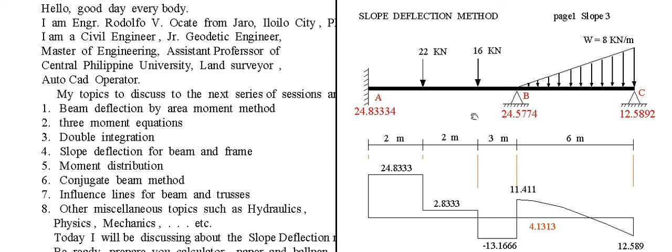So we need to determine first the formula for the fixed end moment. We need the area for the fixed end, both sides of the beam as fixed when loaded with uniform load.

The formula of the fixed end moment at A is equal to fixed end moment at B, and the formula is WL square over 12. For concentrated load, the fixed end moment at A is PAB square over L square, where A is from A and B is from B.

Then solving for the fixed end moment at B, you just reverse: P times B times A square over L square. For a triangular loading, the fixed end moment at A is WL square over 30. Fixed end moment at B is WL square over 20. Fixed end moment at B is bigger than fixed end moment at A.

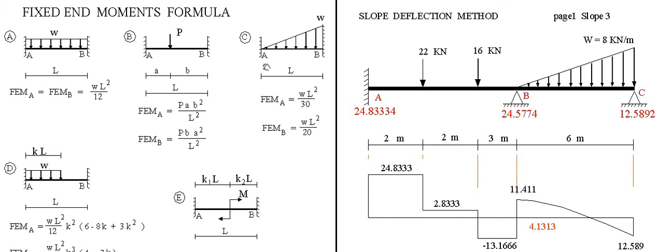Then for partially filled with uniform load, we have this formula, and it is a very long solution, so I just leave that for a while. And if we have a couple loaded in a fixed beam, both ends fixed, we have this also formula.

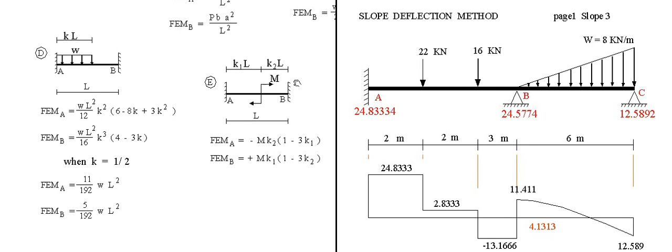Then we have this fundamental equation of slope deflection. We need to have a fixed end moment first. For moment at AB, meaning moment at A, the fixed end moment AB is required, then plus K times 2 theta A plus theta B. The order of the subscript is A first, then B.

A, then B. For moment BA, we need to have a fixed end moment BA plus relative coefficient stiffness factor 2 theta B plus theta A. The same, we follow this order: B first, then theta A.

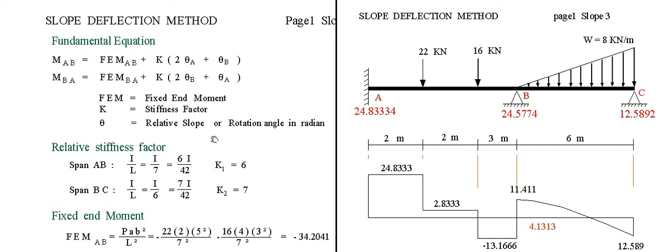Definition of fixed end moment, K stiffness factor. This must be relative. Theta is the slope or rotation angle in radians. Okay, relative stiffness factor.

For this, given now the 7 and 6, the span AB is 7 and BC is 6. So for AB, relative stiffness factor is I over L, this is 7 for AB. Then span BC is I over L, or I over 6.

Solve for the least common denominator for 7 and 6. So 42 is the least common denominator, meaning 42 can be divided by 7, and 42 can be divided by 6. So this is a proper choice of the denominator. We call this the least common denominator.

So 42 divided by 7 is 6 times I, or 6I. This is also 6I over 42, which is I over 7, just simplified. Then 42 divided by 6 is 7 times I, or 7I. This is also I over 6. Now this simply shows that the K here for AB is 6 and the K for BC is 7.

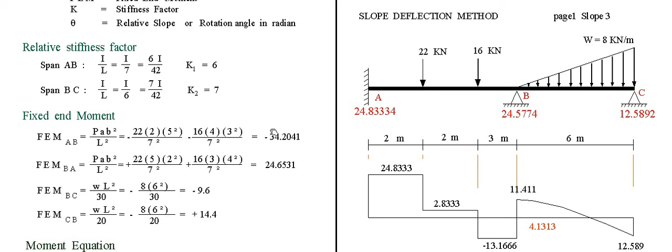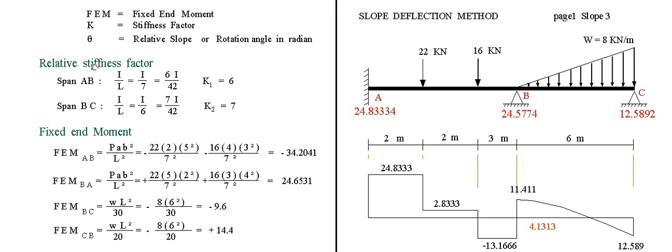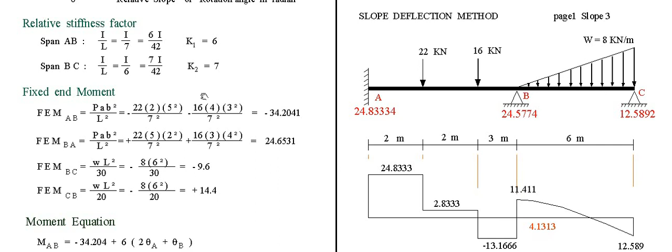Now, requirement for the slope deflection, you have to follow these headings or instructions: relative stiffness factor, fixed end moment, moment equation, joint condition, joint moment condition, then the reaction. The order of solving this, you have to follow this. If you want to have a shortcut, then do so, but this is my best approach. You have to follow this.

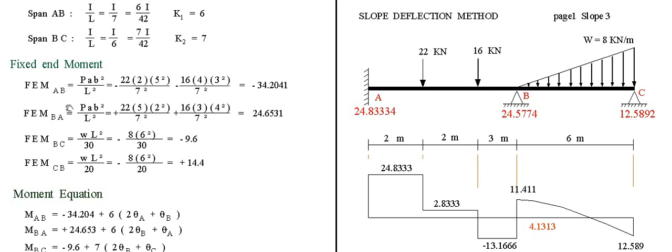So the fixed end moment for AB, we have basic equation PAB for any concentrated load. The formula is still the same. I will explain this. For A, fixed end moment is 22 times 2 times 3 square, 5 square. Again, 22, nearest to A is 2, then further from A is 5. So this is 22 times 2 times 5 square over span of 7 square, PAB square over L square.

Then another load is nearer distance to A, 4, then 3. So minus 16 times 4 times 3 square over 7 square. Near distance is 4, then 3, far distance 3 square divided by span of 7 square. Simplifying this, the fixed end moment is minus 34.2041.

For fixed end moment BA, from here up to here, I will discuss here first. For 22, fixed end moment BA is 22 times near distance 5, then far distance 2 square divided by 7 square. This is the one: 22 times 5 times 2 square divided by 7 square.

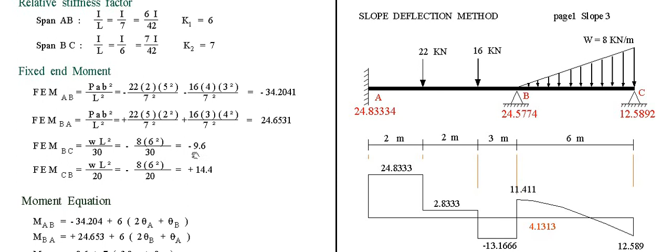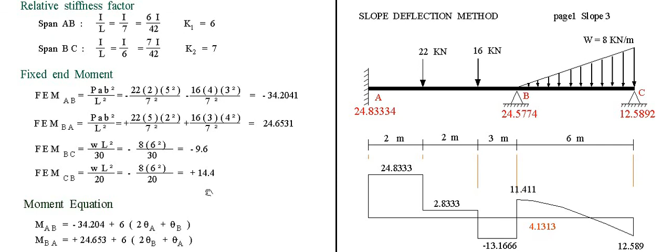Okay, for the source span. Then next heading is moment equation. So the formula is fixed end moment AB plus K times theta A plus theta B. This is fixed end moment equation. Fixed end moment times the K, 6, here 7. Remember, this is 6. For the first span, stiffness factor is 6, then second span 7.

So we have moment equation: we have 34.204 fixed end moment plus relative stiffness factor of 6 for AB times theta A plus theta B. The order is A first, then B next. Then moment BA, fixed end moment first is 24.6531 plus the K for AB, 6, times theta B plus theta A.

Stiffness factor here is 6. For the next span, BC, stiffness factor is 7. Fixed end moment 9.6 plus stiffness factor of 7 times theta B plus theta C. Then moment CB is fixed end moment of 14.4 plus 7 times theta C plus theta B.

So very easy to remember. Then the joint condition also very easy to interpret, that moment BA plus moment BC, they are equal but opposite in sign. So if they are equal but opposite in sign, when you add the two moments here on the left and on the right, the sum is 0. Okay, the sum moment BA plus moment BC must be 0.

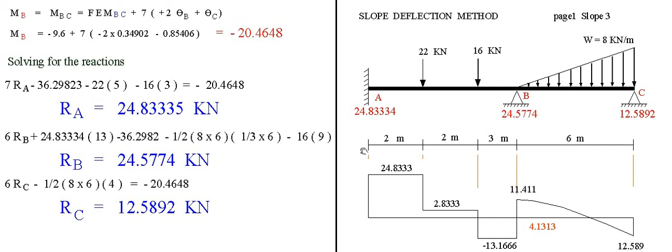Then solving for RB, you take moment at C, which is simpler than taking moment pivot at A. Anyway, you can proceed with either moment at A or moment at C. In this solution, I take pivot or moment at C equals 0. So RA now is given as 24.833, since it was already solved. I want to solve RB, which is not yet solved. So take moment at C equal to 0: RB times 6 plus reaction at A

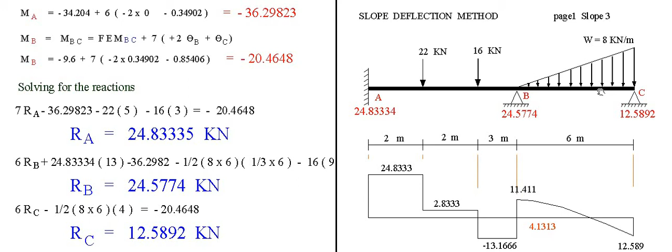times 13 (distance 6 plus 7), then there is moment at A of 36.2982. Then the triangular load is 1/2 times 8 by 6, times distance from C of 1/3 of 6, or 2. Then minus the concentrated load of 16, this distance is 9. Then minus 22, this distance is 5 and 6 is 11. Then equate to 0.

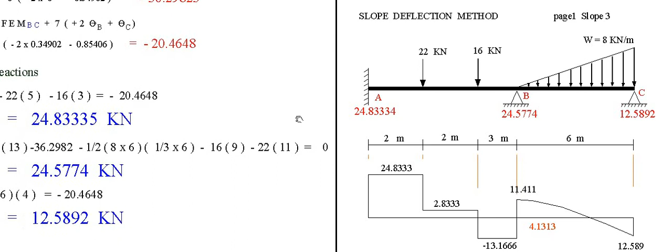We have one unknown RB. Solving for RB, we get RB equals 24.5774.

Using a simple calculator, now to solve for RC, cut the section at B, then consider only the right side of B. Never mind the left, because on the left the moment...

On the left of B, this is equal to positive moment at B, 20.4648. The direction of the moment at B is counterclockwise here.

Negative here means you bend the beam going clockwise. Moment at B here is clockwise, this one counterclockwise.

Then, given the three forces RA, RB, RC, and the external forces, you can draw the shear diagram as this.

Okay, there is a problem here - whether the parabolic curve, this triangular section, the next curve is parabolic - whether this is concave downward or concave upward.

Now you can plot this, but you don't know the nature of the curve. So my analysis is that considering the force, the shear - the rate of drop of this triangular...

At the beginning of B, the rate of drop is very small. From 0, it is increasing and increasing until maximum at C. The rate of drop here is very small, so the rate of drop is very small. This is almost horizontal at first, then drops higher and higher going to C.

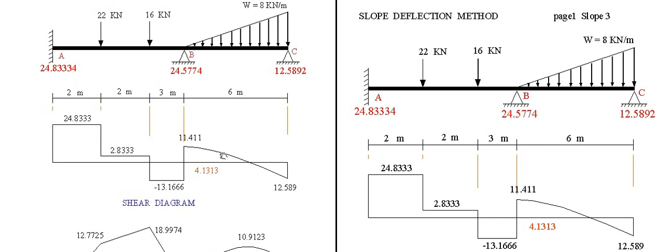So I am sure this is concave downward, not concave upward. So it is very easy to plot the shear diagram or whatever curve - just take note of wherever the rate of drop is.

Then the moment diagram will look like this - this is third degree parabolic, this is second degree parabolic. Now this discussion of the shear moment diagram is under strength of materials, and I don't want to discuss this anymore. Even writing the second degree here, it's up for you to interpret, but the values are now ready for you.

Just check these moments - this moment we have solved, this moment we have solved. The maximum moment is derived here with this distance. I want to discuss this, but as I've said, this is under strength of materials.

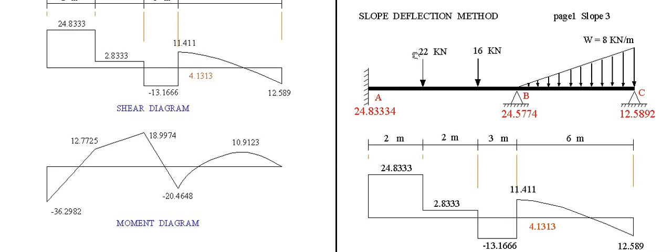Okay, that concludes the solution to this, and I challenge you to solve a practice problem. This is a new problem for you.

Change P1 to 18 instead of 22, change that to 18. P2 is 15 here, and W instead of 8, change that to 10. Then solve for that.

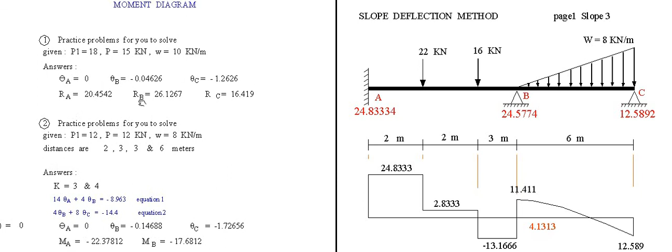Okay, theta A is 0, theta B is like that, and theta C is negative. Then RA, RB, RC are these.

So for you to practice on your own, use my guide on how to solve. These are the answers: 2 moments and 3 reactions.

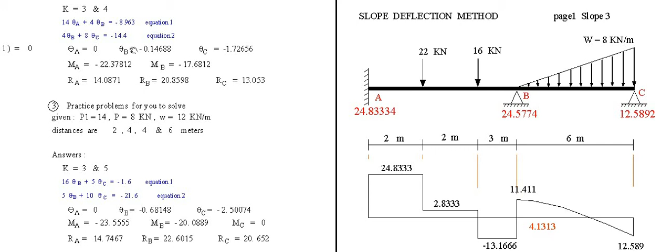Now the second challenging problem: P1 is 12, P2 is also 12, then W is 8. Change only this. Then the answers are - I make the solution, the equation instead. Okay, we have 2 equations, equation 1 and equation 2.

Then solving for theta A is 0, theta B, and theta C is still negative. Then moment at A and moment at B. Then the 3 reactions here.

Okay, then another challenge, third problem: P1 is 14, P2 is 8, and W is 12. And change the distances - these distances as 2, 4, 4 and 6, 2, 4, 4 and 6.

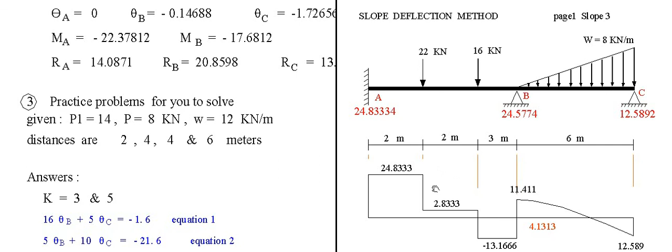The previous problem, we also change the distance here and the second one. So for the third problem, we change the distance also: 2, 4, 4, 6, 2, 4, 4, 6. Then we have this answer.

Okay, pause for a while, look, or just pause your video, then copy this.